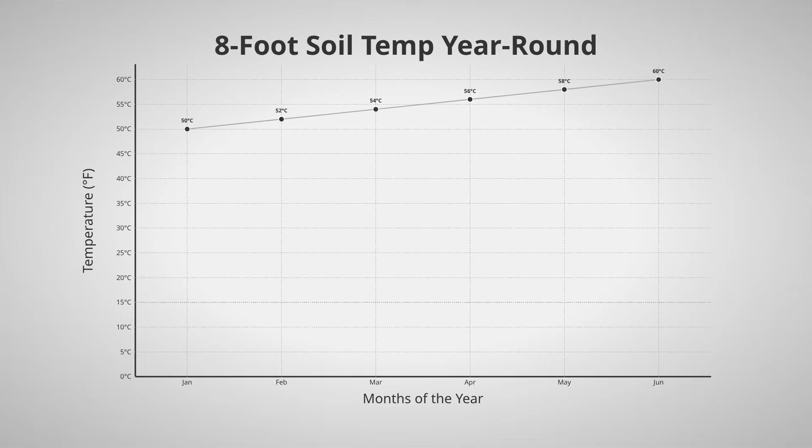8 feet beneath your home, something extraordinary is happening right now. It is something so simple and yet so powerful. It has quietly existed for thousands of years without most people ever realizing it. While the air above you constantly shifts between heat waves and freezing temperatures, the ground below remains almost completely unchanged. It holds a steady temperature that does not rise, does not fall, and does not react to the chaos above

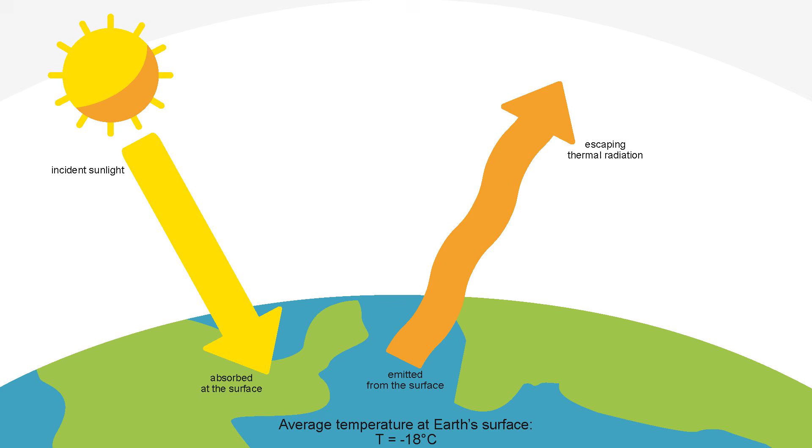the surface. And what makes this even more fascinating is that this stable temperature is not random, nor is it a coincidence. It is the result of a natural process that turns the Earth itself into a thermal battery, one that absorbs heat slowly, stores it over time, and releases it so gradually that it creates a permanent zone of stability just a few meters below your feet.

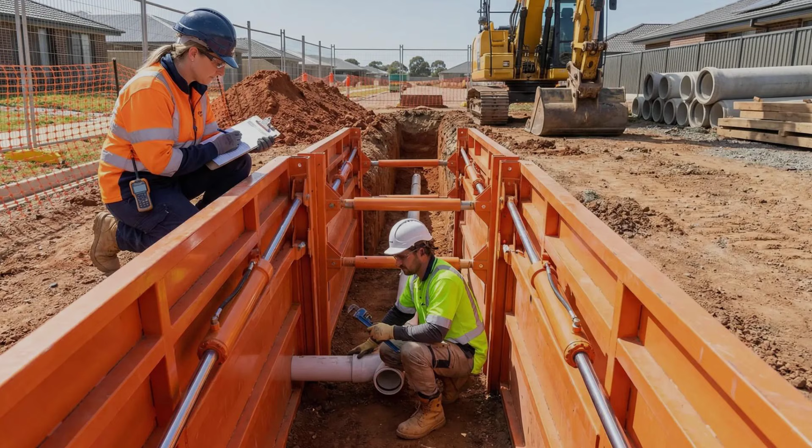Once you go deep enough, roughly 2 meters beneath the surface, the daily and even seasonal temperature fluctuations simply disappear, replaced by a constant baseline that reflects the average annual temperature of that region. That means that in many parts of the world, the ground quietly maintains a temperature somewhere between 10 and 15 degrees Celsius, regardless of whether it is snowing above or the sun is burning everything in sight.

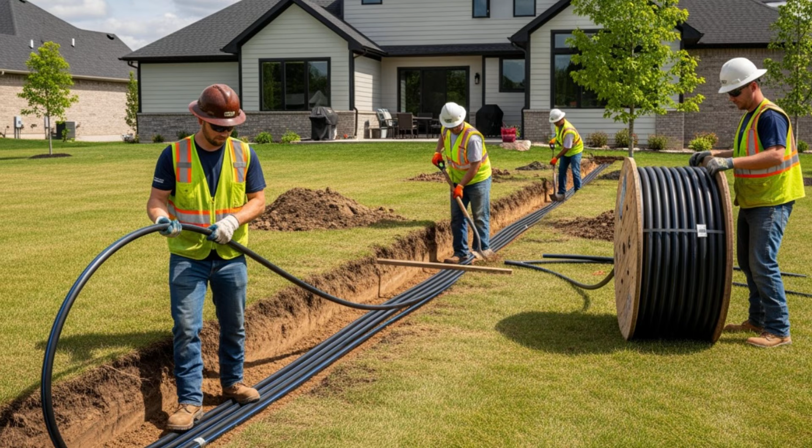And this is where things start to become difficult to ignore. What modern homes spend enormous amounts of energy trying to achieve with air conditioning systems, heating units, and complex climate control technologies, the Earth is already doing for free, continuously, silently, and with perfect consistency. But this is not a new discovery.

In fact, what is far more surprising is that ancient civilizations not only understood this, but actively built entire systems around it. They designed cities, homes, and infrastructure in ways that allowed them to tap directly into this natural stability, long before electricity, long before modern engineering, and long before anyone ever imagined a world dependent on mechanical cooling.

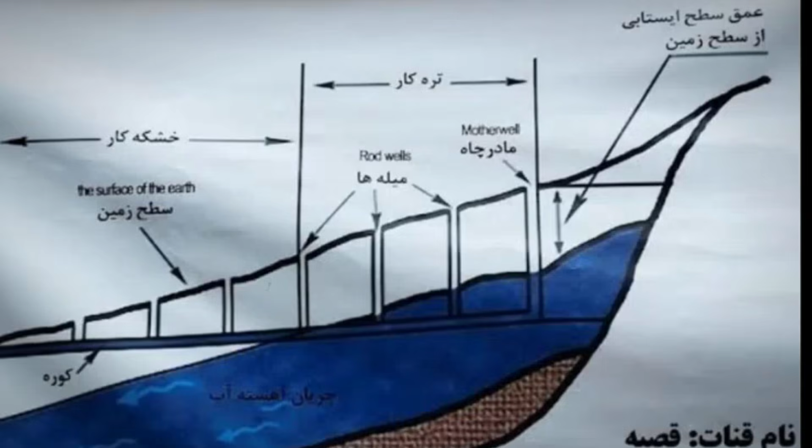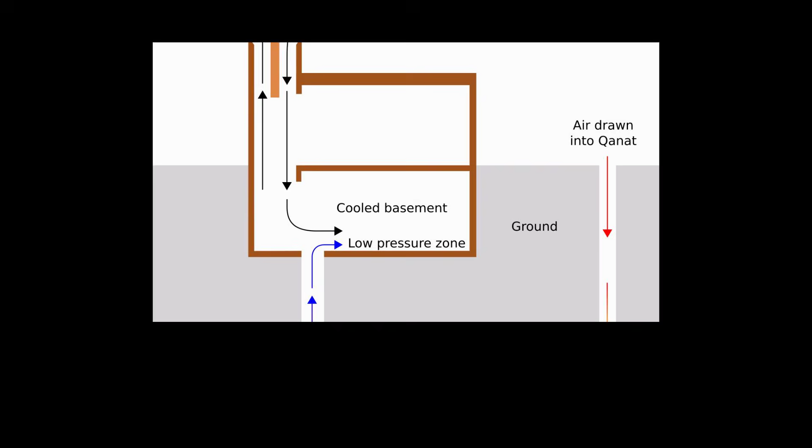In ancient Persia, engineers built vast underground tunnel systems called qanats. They were designed to transport water long distances beneath the desert, but they also had a secondary and equally important effect. As air passed through those tunnels, it lost heat to the surrounding Earth and emerged at the surface much cooler than the scorching air above.

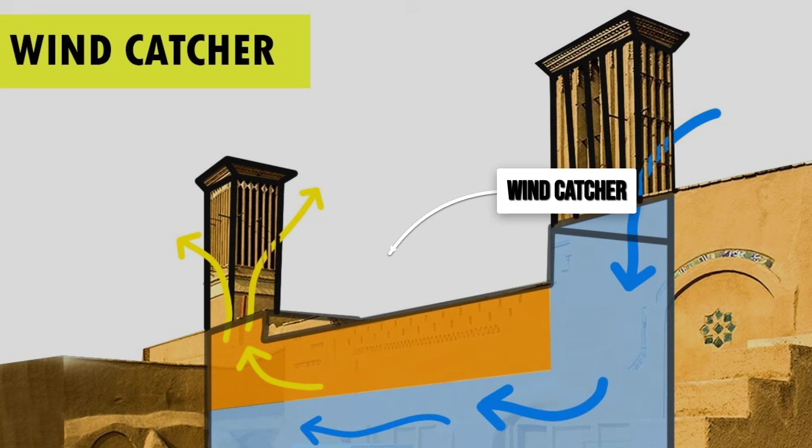When these systems were combined with wind catchers, structures that captured airflow and directed it downward into buildings, something remarkable happened. Hot desert air was pulled through underground channels, cooled naturally by the Earth, and then released into living spaces, creating an environment that remained comfortable even when outside temperatures exceeded 40 degrees Celsius.

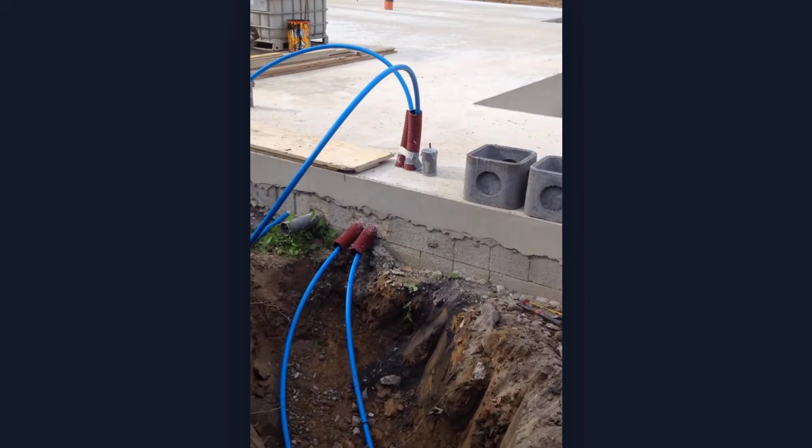Perhaps even more astonishing, some of these systems could preserve ice through the entire summer in the middle of the desert without any refrigeration. They relied entirely on passive cooling, insulation, and the stable temperature of the ground below.

At the same time, in completely different parts of the world, similar ideas were emerging independently. That suggests this was not a rare or isolated innovation, but a natural conclusion that humans arrived at once they began to understand how the environment around them behaved.

The Romans, for example, incorporated underground air channels into their villas. They allowed cool air to pass through shaded, earth-cooled corridors before entering living spaces, effectively reducing indoor temperatures without any mechanical assistance. In Korea, traditional architecture used underfloor heating and cooling systems that leveraged the thermal properties of the ground to maintain comfort throughout the year.

In the American Southwest, indigenous communities built partially underground homes, using the surrounding earth as insulation. That protected inhabitants from extreme heat during the day and from cold at night, creating stable living conditions in environments that would otherwise be hostile.

So when you look at all of these systems together, across continents, cultures, and time periods, a pattern begins to emerge. These civilizations were not relying on technology in the modern sense, but rather on observation and on working with natural systems, instead of trying to overpower them.

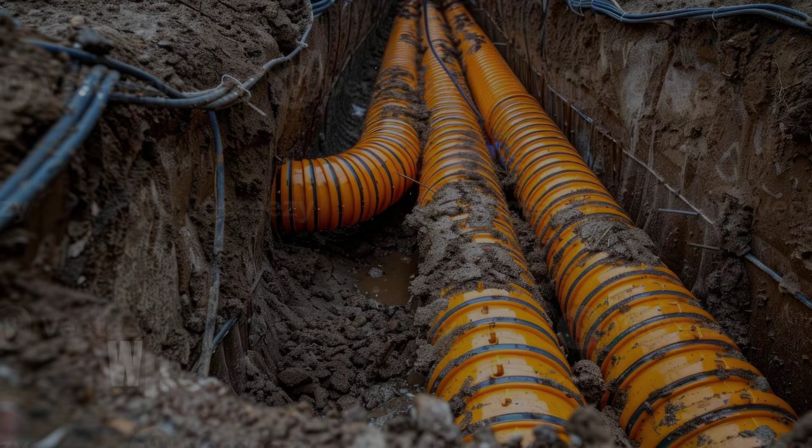Which leads to a question that becomes increasingly difficult to ignore. If this worked so well, why did we stop using it? Because the answer is not that these systems failed, and it is not that they became obsolete.

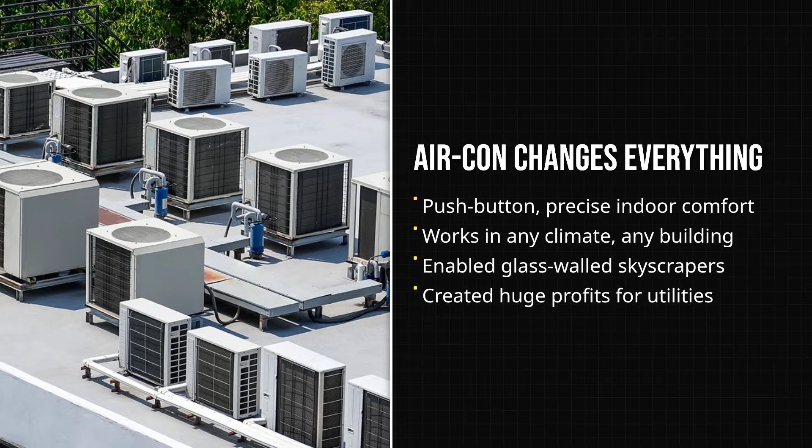Rather, they were gradually replaced by something else, something that offered more control, more scalability, and perhaps most importantly, more profit. Because in the early 20th century, the invention of modern air conditioning changed everything. It began with systems designed to control humidity in industrial environments, but it quickly evolved into a technology that could regulate temperature in homes, offices, and entire cities.

And as this technology spread, it did not simply offer an alternative, it redefined expectations, because comfort was no longer something that depended on design, location, or environmental understanding, but something that could be achieved instantly, at the push of a button. And over time, this shift began to reshape architecture itself, as buildings were no longer designed to work with natural airflow, natural shading, or the thermal properties of the ground, but instead became sealed environments, entirely dependent on mechanical systems to maintain livable conditions.

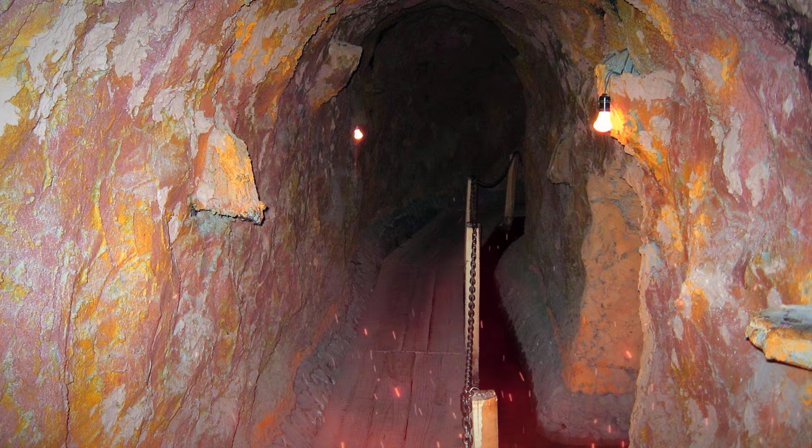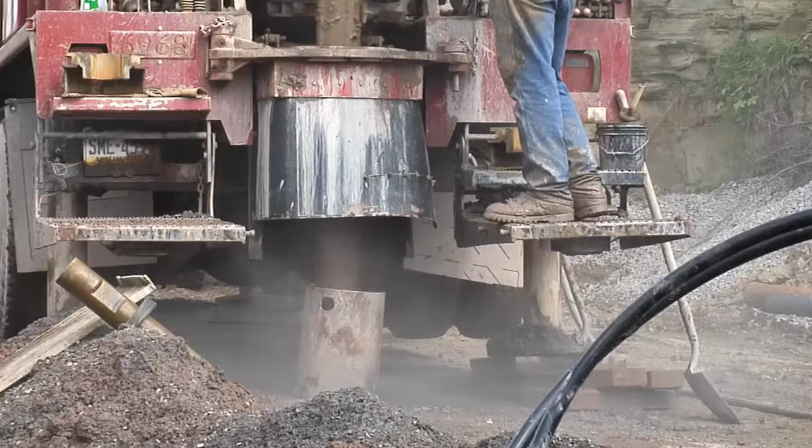And as this happened, the older knowledge did not disappear overnight, but it slowly faded, becoming less common, less taught, and eventually almost completely forgotten in many parts of the world. But the physics never changed, because the ground beneath us is still there, still stable, still maintaining that constant temperature, regardless of how we choose to build above it.

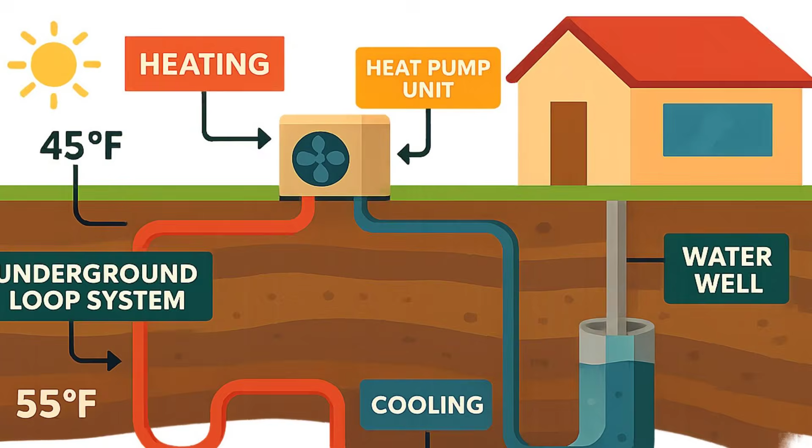And in some regions, that knowledge was never lost, because in parts of Europe, particularly in Germany, Austria, and Switzerland, systems known as earth tubes are still being used today. These systems move air through pipes buried underground so the air can exchange heat with the surrounding soil before it enters a building. The results are not theoretical, they are measurable.

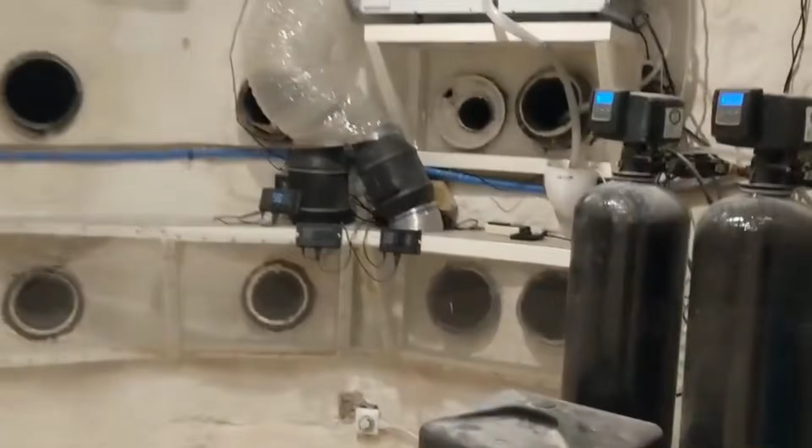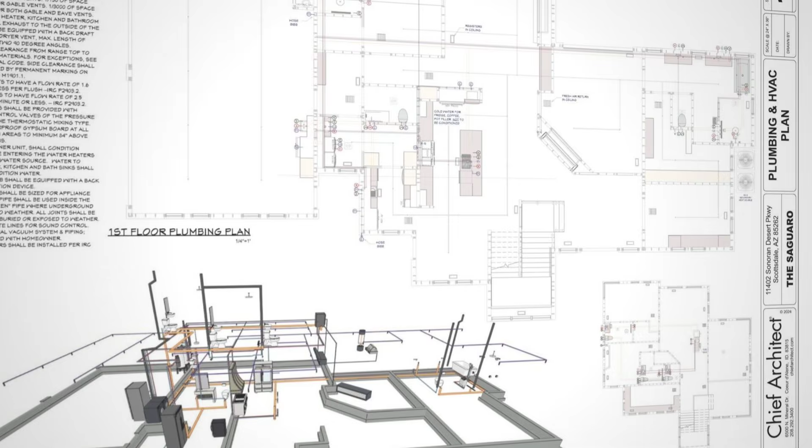In summer, hot air entering these systems is cooled significantly before it reaches indoor spaces. In winter, cold air is warmed by the ground, reducing the energy required for heating. Over time, this leads to substantial energy savings, often reducing the need for traditional heating and cooling systems by a significant margin. But like any system, the effectiveness depends on how it is designed, because depth matters.

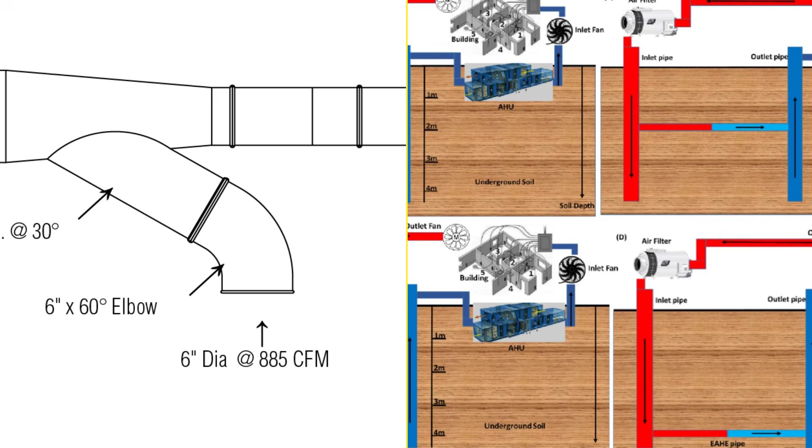Too shallow, and the ground temperature fluctuates with the weather. Too deep, and installation becomes impractical. Airflow must be carefully controlled, because if the air moves too quickly, it does not have enough time to exchange heat, and if it moves too slowly, the system becomes inefficient.

Then there is moisture. As warm air cools underground, condensation forms, and if that moisture is not properly managed, it can lead to problems such as mold or reduced air quality. So while the concept itself is simple, the execution requires precision, planning, and an understanding of how these elements interact.

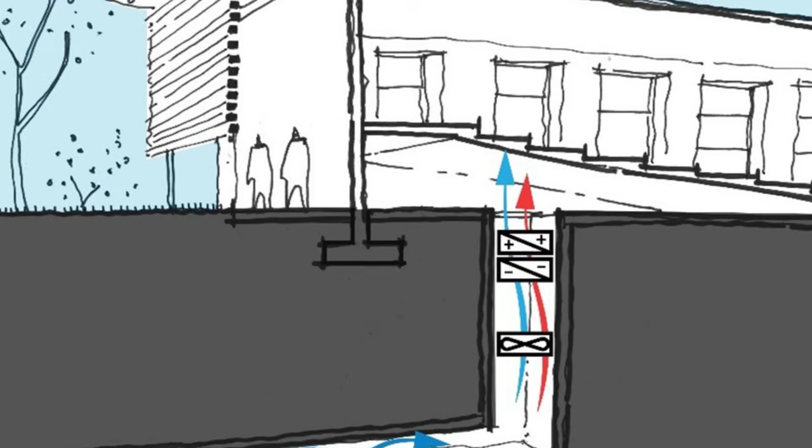But once everything is aligned, something subtle begins to happen, because instead of fighting against the environment, the system begins to work with it, smoothing out temperature extremes, reducing fluctuations, and creating a space that feels more stable, more balanced, and more consistent over time. And perhaps that is why this approach is so often overlooked, because it does not feel dramatic, it does not produce instant, noticeable changes, it does not rely on visible machinery or constant noise. It simply works, quietly, consistently, in the background.

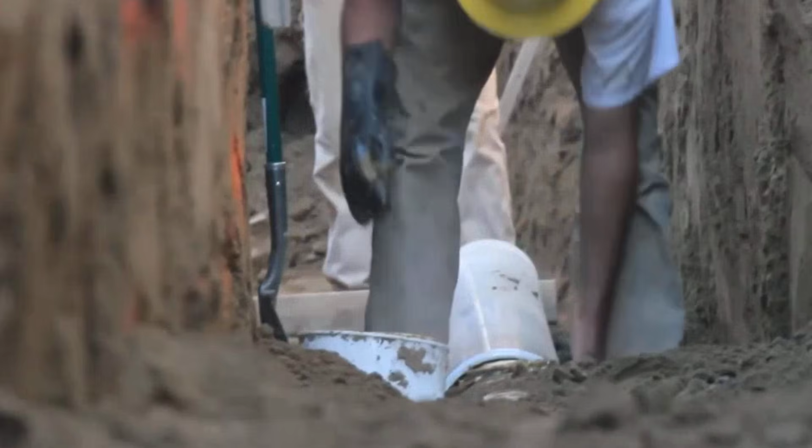Which brings us back to the same question. If this has always worked, if it still works today, and if the solution is literally beneath our feet, then why is it not everywhere? Because the answer is not found in science. It is found in systems. Economic systems that prioritize certain solutions over others. Educational systems that determine what is taught and what is ignored. And regulatory systems that define what is considered standard practice.

And once those systems are established, anything outside of them becomes invisible. Not because it does not exist, but because it is no longer recognized. But the ground does not follow those systems. It does not respond to trends, markets, or technology. It responds only to physics.

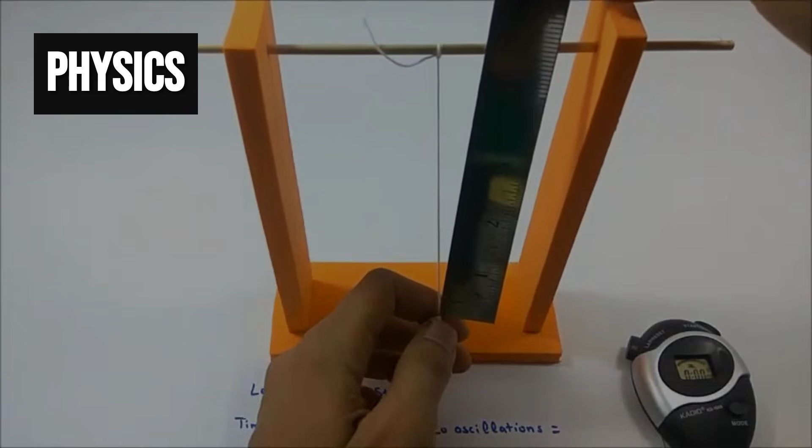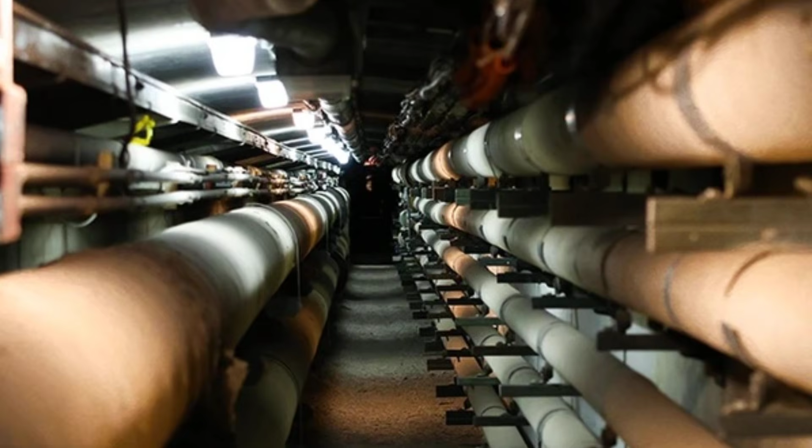And that physics has remained unchanged for thousands of years, which means that beneath every home, beneath every city, beneath every place we have built, there is still a stable, constant environment waiting to be used. Not as a new discovery, but as something we once understood, and may be starting to understand again.